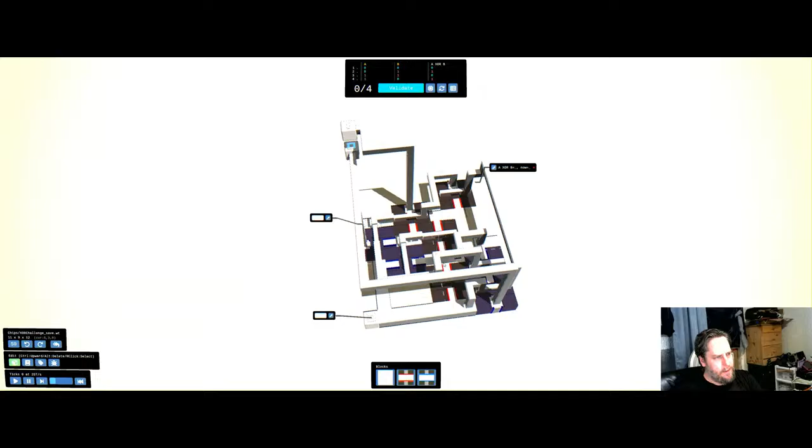This is based off of a design that I had found. I was really struggling with the NAND gate or the AND gate, one of the gates. I was trying to get it down to 5 MOSFET chips, and I really couldn't wrap my brain around it.

I probably spent off and on, either Sunday or Saturday or both, one of those days, spent off and on working on it.

I'm having trouble explaining this. My thought process, the way I work, is I like to focus on something I want to figure out, and I'll really get into it. If I'm noticing I'm not making any progress after a while, let's say like an hour, what I typically do is I'll leave it alone. I want to kind of break, try to break where my brain's going for a moment, because it's not working.

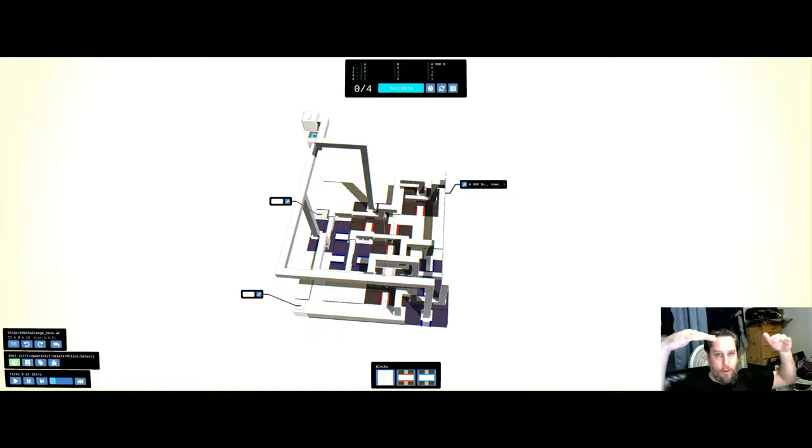So I try to snap out of it, break myself away for a moment, whether it's to go get a snack or a drink, use the restroom. Sometimes I'll even go outside, get a breath of fresh air, things like that. I do that with my work, my job, all sorts of things in my life. That's something I do because I'm an optimizer, and I am somebody who will just bang his head against that wall until I figure it out.

I'm very patient. When I get on a task that I want to figure out, I will spend sometimes a lot of time figuring it out.

So throughout the weekend, even though I probably have several hours on this game, I probably only spent a couple of those hours actually at my computer, and other times I either just broke away, did something else. But I didn't close out the game, because the moment something pops in my head and I go, oh yeah, let me try this, I want to get back into it and get right on it. So even if it's something on the computer or at my office or anything in my life, if I'm doing that—

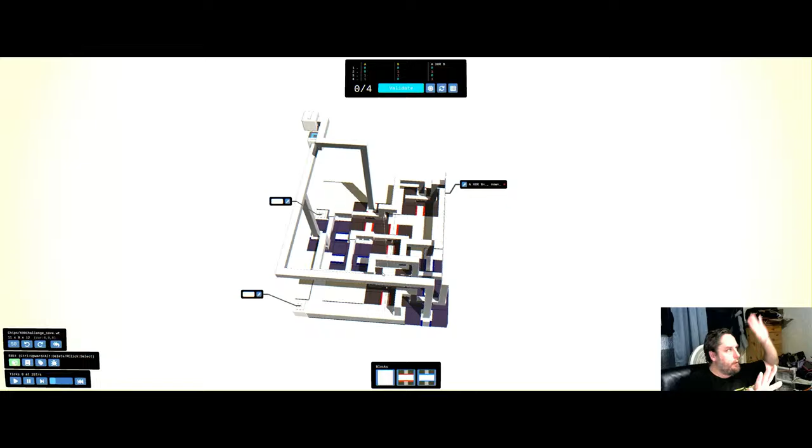but that's kind of my process, I'm trying to figure this thing out. And if I'm struggling with it, sometimes I'll just leave it static, leave it where it's at, and remove myself from the situation and go do something else to give my brain a break away from it, because wherever I'm at in my thinking is not working, and I've been working on it for a while, and I want to kind of break that thought process for a moment and then get back to it from maybe another angle of attack or something.

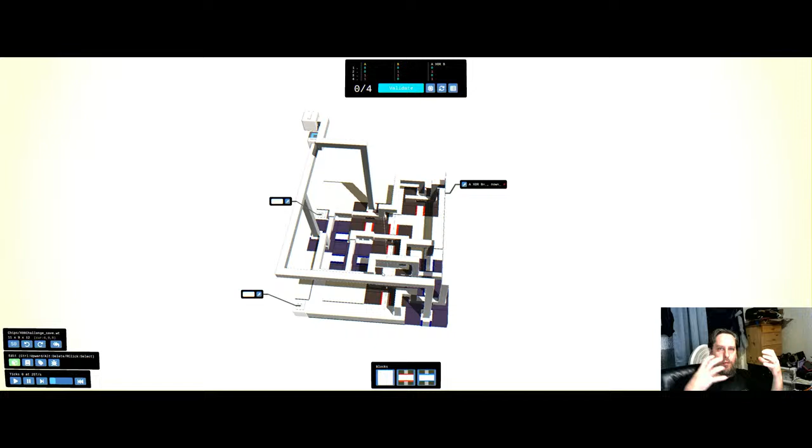That's the best way I can try to explain it. I don't consider myself as someone who has an ego. Like, I don't sit here and go, when I figure this stuff out, 'oh man, I'm so smart, look at me, I'm amazing.' I don't do that stuff. I don't do anything like this, or even in my job or my life, as waving a flag like 'look at me, look how smart I am, look how good I am at something.' I just focus on the task and achieve it.

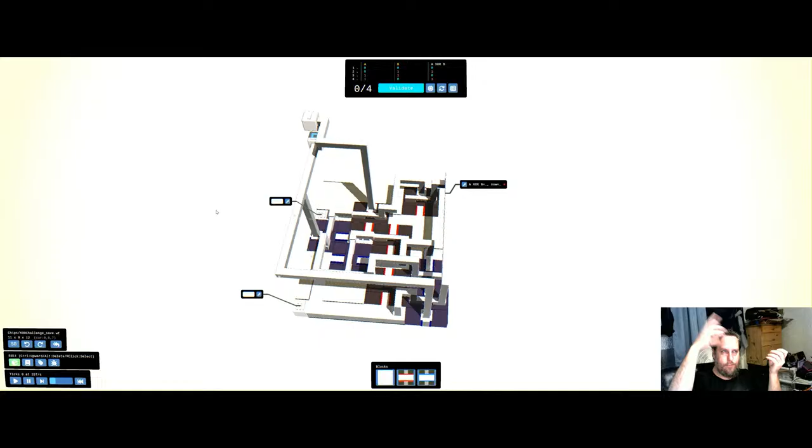Because, without going on a really long tangent, another example I can give is someone like Mike Tyson when he was young. Cus D'Amato, his trainer, his guru, whoever you want to call him, who was training him early on, was hypnotizing him and doing things with his psyche to say, 'this isn't about you, it's about the task. There is no you, it's just the task.' That's kind of a similar thought process that I have with things like this.

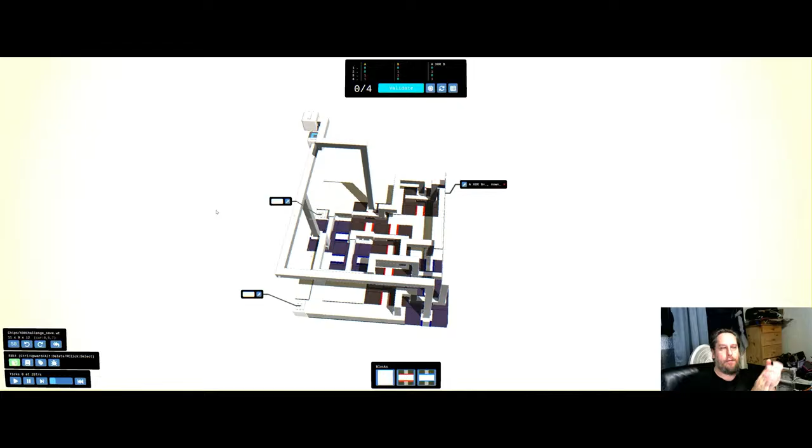It's not about whether I succeed or fail, it's not me, it's this thing. So that's another example I can try to give about that.

I'm still human. I'm not saying I'm some kind of robot, but I'm robot-like in that sense. I really try to remove my ego from a lot of things. Most of the time I'm successful, but sometimes I'm not because I'm a human being.

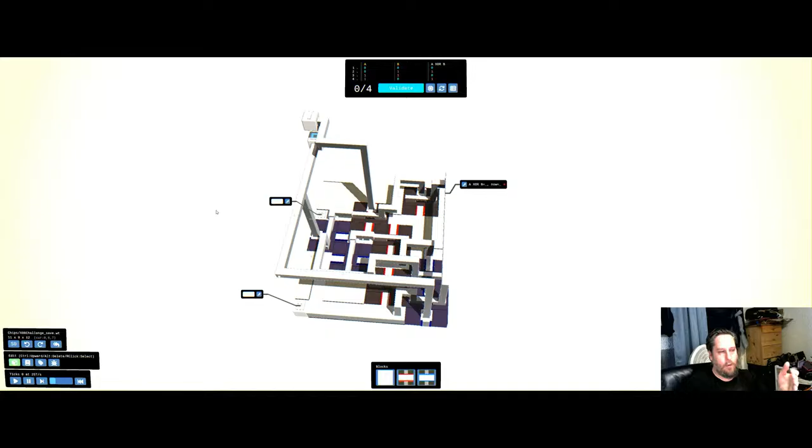So that being said, if there's something I'm doing and it's frustrating because it's like, man, why isn't this working? I messed around with this design, I think it was on the AND or the NAND or one of the two. I was really trying to implement it. Let's just, I know this one works, so let me just save it because I guess I had deleted it, messing around with it earlier.

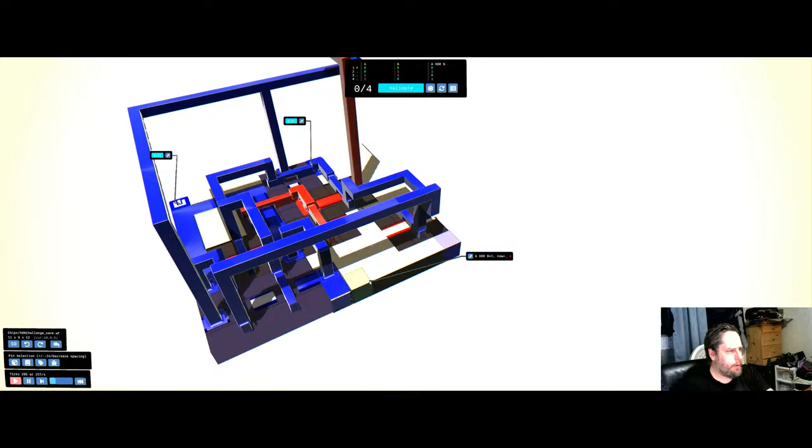Where was the output? I don't even remember where the output was on this one. I think this is it right here.

Yeah, I mean the blueprint's there anyways.

I want to say it was the XOR because I had already had a good OR chip and I was struggling with getting an advanced XOR. I couldn't wrap my brain around why it wouldn't work. And I think this is where I found this one online through Steam.

I did check a few things like the Reddit. I couldn't get it for some reason. The Discord server invite doesn't work, I couldn't get into the Discord server, so I was looking for some kind of guidance with stuff. The only thing I found was a picture through Steam that gave me this.

I know in the game there's ways to import and export blueprints, which is nice, but it's important for me that I understand why it works too. So I really don't want to blindly copy stuff.

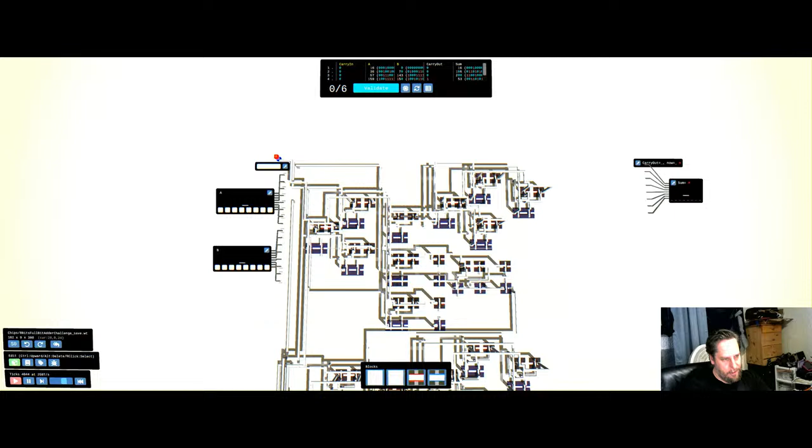So here's the one that I came up with. This is like within day 2 or so of doing this game, and you can see how inefficient it is. Because again, you're using all of this stuff and just integrating it, and it's just so many blocks, so much real estate, so much going on.

It's just terrible. I don't remember if I actually finished it. Did I? Oh, these moved up there. I think I did, and you just have to move them to their individual positions, because I'm seeing outputs. I don't remember, it's been at least a week or so. But I think this was a working chip, if I remember right.

And it was at that point I'm like, this is terrible. I know this one's working, and you see how this one's red. I haven't done anything with these yet because I wanted to optimize these, and I wanted to wrap my brain around how all this stuff works.

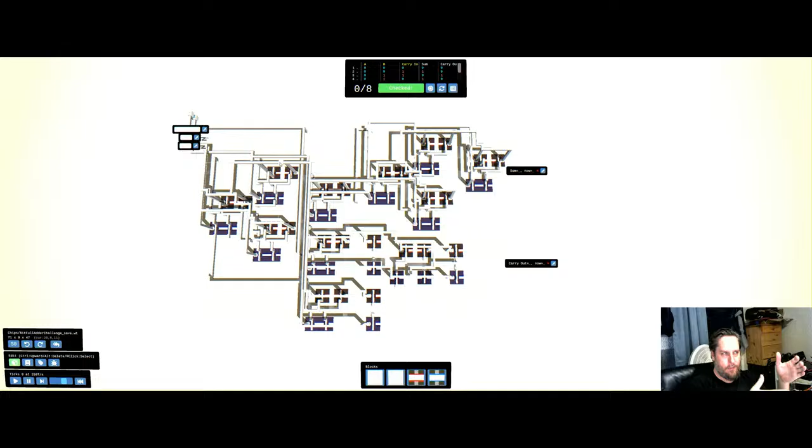So I'm kind of just looking back at what I had done, and you can see how horrible these things are. But when you're first starting out and first grasping this stuff, you just want it to function, to show that you're doing inputs, outputs, voltage, and actually doing that. And then you can start taking the next step.

So yeah, this was my first design of this chip. Pretty rough, but it worked. These worked, they're just inefficient. I thought I'd finish this one, but maybe at that point I was like, nah, I already know this is horrible, this is completely inefficient, and I just want to leave this alone and get back to the basics and understand how this stuff really works.

And that's where I'm getting to. I'm starting to feel more confident that I'm getting this stuff pretty good. So that being said...

Back to the ego and the learning thing, I definitely separate myself, because it's easy to feel defeated and look at this stuff and go, I don't understand this, this is hard, this is terrible. I get it, I really do. I deal with that, people. I deal with those feelings myself. It's rare, but I deal with it when I come across it.

And if I really have something I want to learn, the moment I feel that frustration, where I'm like, God, I really wish this would work, or this problem would go away, the moment that frustration creeps in, I instantly turn it around. I go from feeling angry or mad into, hey, I'm about to learn something.

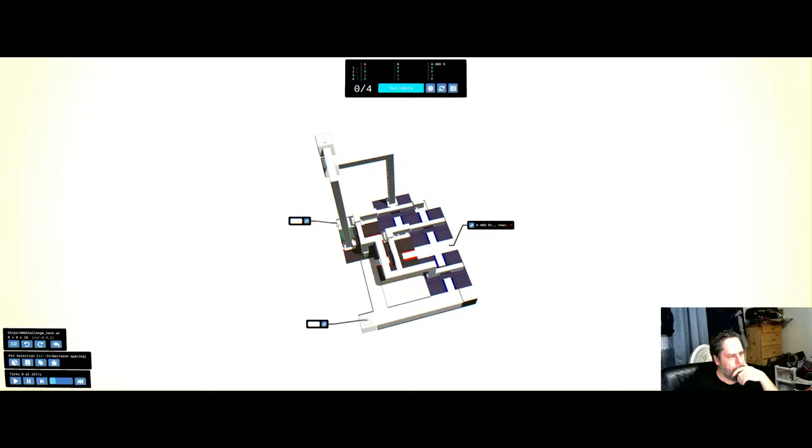So I couldn't figure this guy out. I think it was Saturday. I think Sunday I got this design, and then I started working on how this design works. So I'll just show it real quick. So you see how those gates work - those are pretty cool. Once I first saw that, I thought, wow, that's pretty cool.

But I couldn't figure it out. I want to understand how to come up with this, and I don't want to just simply use it and copy it. What's important is really doing the outside math, and you have to do some solving and planning. If you're trying to do it on the fly and you don't really know what you're doing - like I thought I knew, but I didn't - you're going to fix one problem but cause another, and then fix that problem and cause another. That was the spiral I was involved in.

I'm like, man, okay, I got this. Now I caused that problem. Now I got this, now I caused that problem - and I can explain that in the other blueprint. The other one, I think it was this one or this one. Let me see. So you can see some of that design from the other one.

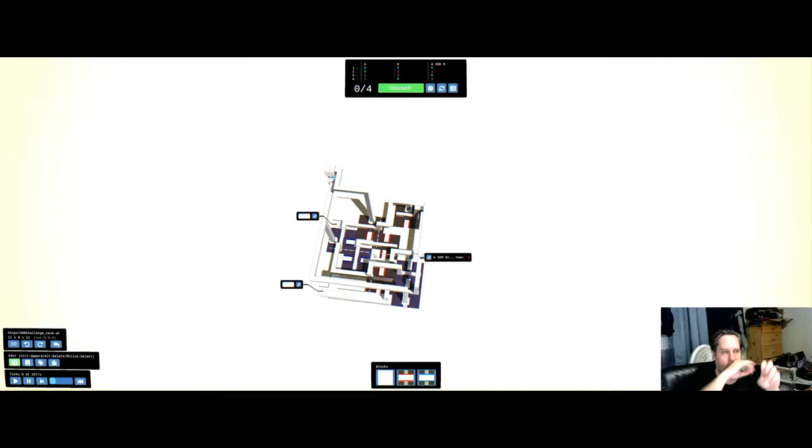In the AND and the OR, they're just opposites. So you can do essentially the same design, and you're just switching the negative and positive - switching that stuff, and you have to switch your chips. So this is the design I came up with, and I think I can make it even better.

But what I figured out for this chip was taking that - was it the AND? So AND is typically positive flow, and the NAND, your NOR, your XNOR, it's going to be negative - the opposite flow. These are all AC, these are currents. This is alternating current, this is all this stuff.

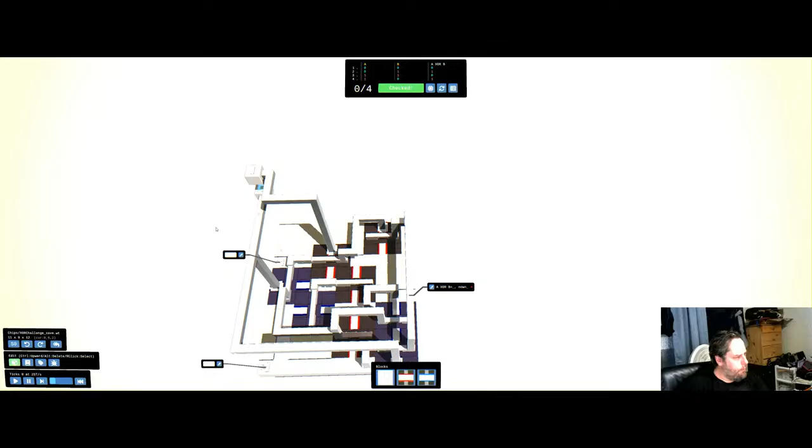And so this one being the XOR, you're going to be doing mostly positive flow. There's a quick little tip on the schematic I didn't know - whenever you have opposite flow, they typically will have a circle on the output.

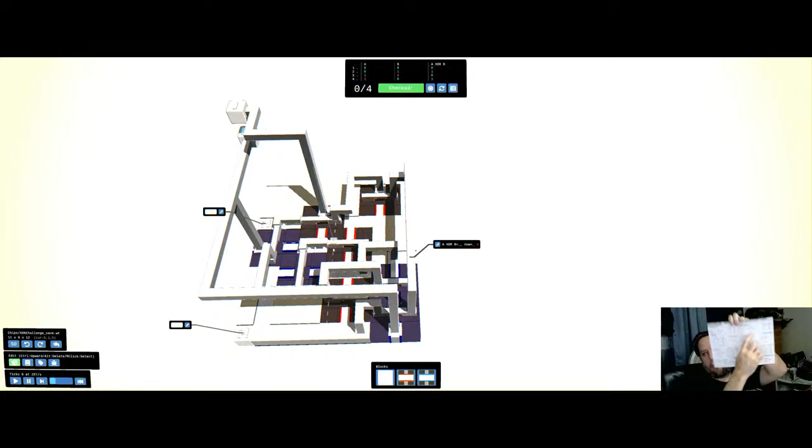That means that's where your flow is coming from. It's not an inverter, it's just reversed, and that's why you see the opposites.

You look at your AND gate and your NAND gate, you look at the truth tables, they're flipped. Your A and B outputting 0, you're going to get a 0 on an AND gate, but on a NAND gate you're going to get a 1. So they're flipped.

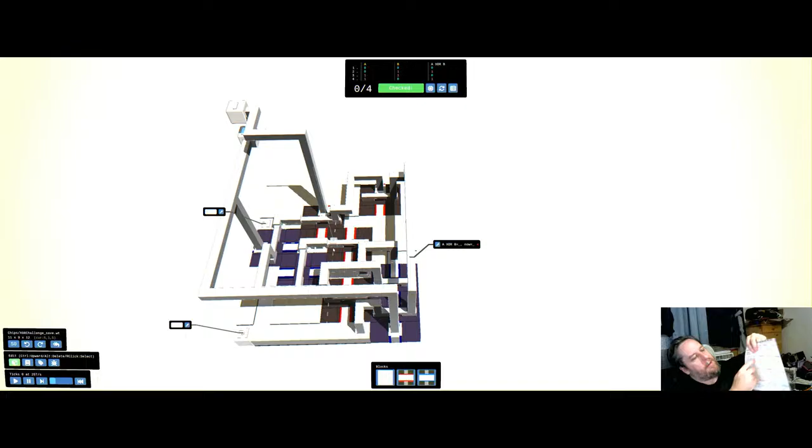The outputs—I mean, I could probably just show my screen instead of showing a paper I printed out, but this really helped me because I could see it.

On your AND gate, every output that's a 0, on your NAND gate the output's a 1, and vice versa. When the AND gate output's a 0 or a 1, on the NAND gate it's the opposite. So it's just simply flipped. They're the same chip—you're just going to flip your input and your output, your positive and your negative.

Your red is your positive, the blue could be the negative—whatever helps you wrap your brain around this. Just make sure you understand that there's a positive flow and there's a negative flow.

Again, if you're going to flip them, make sure that if I put this one here down to here, and vice versa the other one over here, you're going to need to change your chips. This is a positive chip, this is a negative chip—you're red, you're blue. The red guy is not going to flow through a blue chip like that, so you have to reverse them.

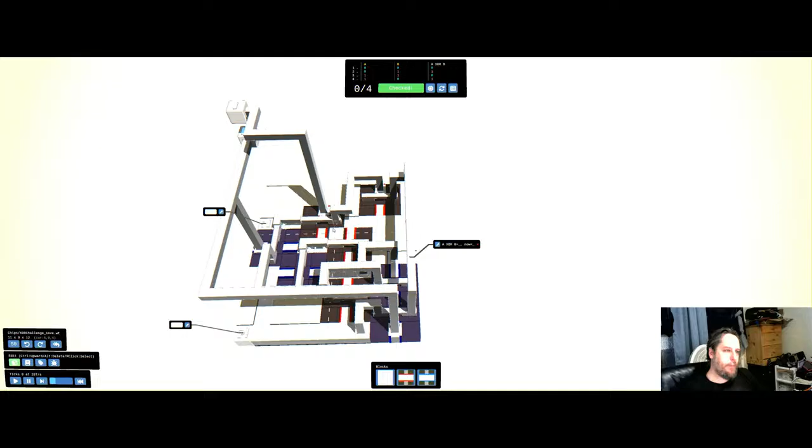So I think I've rambled on enough. Let's do this.

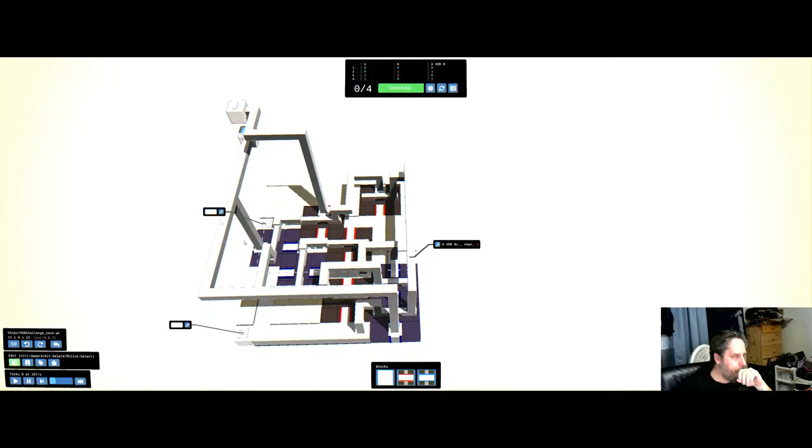This is something I just drew out just before I started. I'm not looking for... let me just get into it. Okay.

So I was working on the XOR chip. I have a good XOR chip—it has 8 processors, 8 MOSFETs, 8 transistors. I believe I have a 7 transistor solution for it.

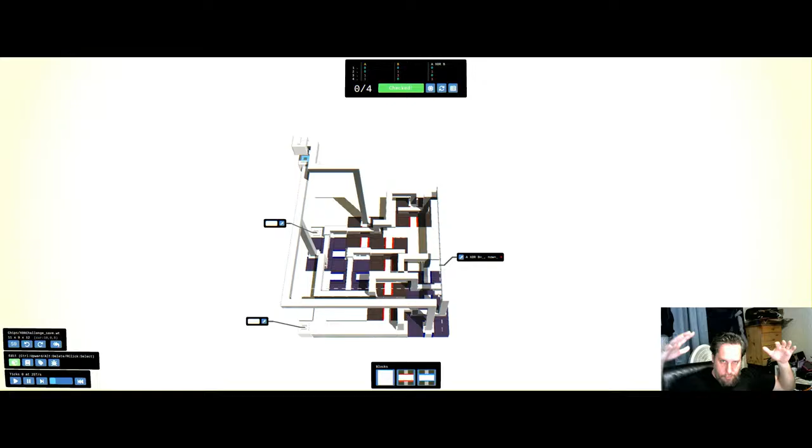And let's see if I got it. I haven't figured out the 6 yet, but this is me just showing the process, showing how my mind works and how I figured it out. Let's see if it does it.

So you can see I simply copied that AND chip. This should be an AND version of it because there's the power here. Let me show that real quick before, because I'll want to.

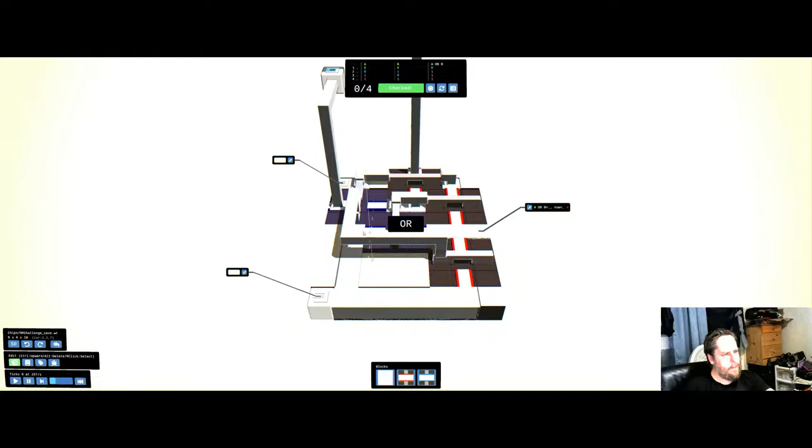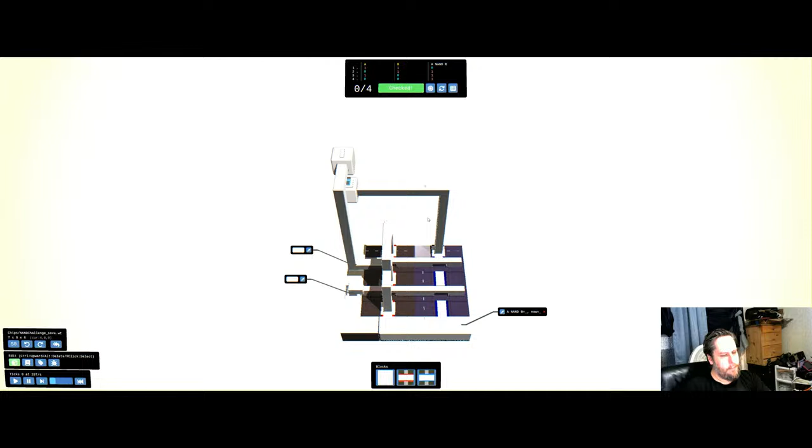So look at the OR—no, I need to look at the NAND. Sorry, I don't want to throw people off. Here's the NAND. I didn't do it—wait a minute. So have I not done a NOR? No, I haven't. That's why. Okay, so I haven't even done that yet, but I want to explain that.

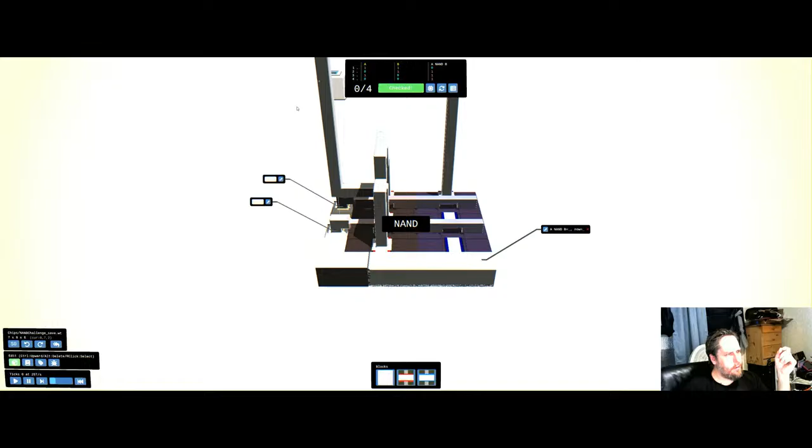So why do I have a... I haven't done a NOR gate yet. There's something that I'm messing up.

So these are the... okay, so when you get to the end, you were at the 6. The schematic was the 6 processor, 6 transistor. Good Lord, man, I'm going in the wrong direction.

Because I haven't done a NOR, and I definitely haven't done an XNOR yet. But I was trying to explain how they are flipped, even though I haven't done them yet. I've done them in my mind on some of this already, so let's get back to what I was talking about—I'll deal with that later.

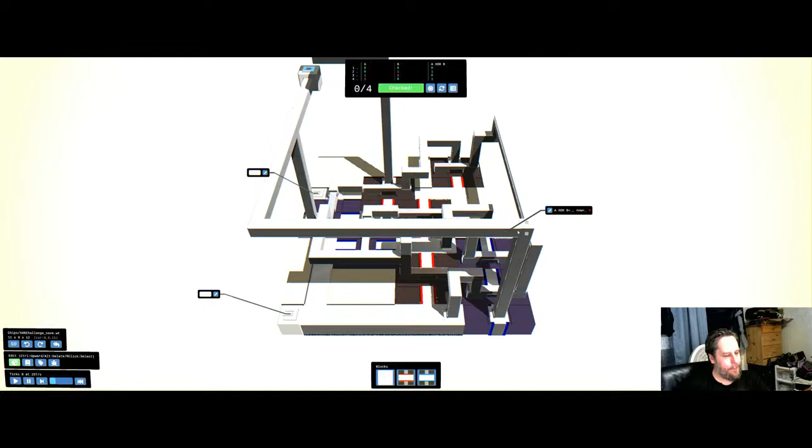So I made a functioning XOR chip by simply taking the design I learned through, it was like a Steam screenshot or something I saw, and I just basically copied it. I didn't import the blueprint, so I drew it out myself.

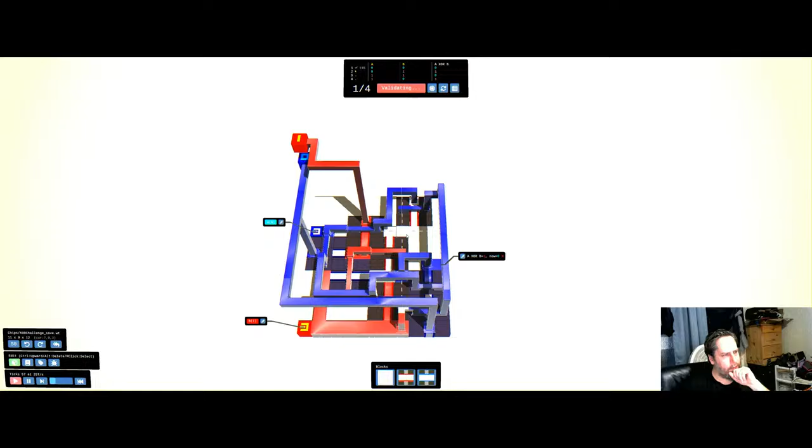And then I added on, in order to do an XOR chip, what I figured out is I just simply added—excuse me, I needed... the final one, I think it was, which one was it? One of these, it was when the red came through, I had to stop it right here. I think it was that one.

So I think here, in order to get when A and B were red and you wanted a blue output, I knew that the only way I was going to get blue was to send the blue negative. I needed that to get to the output, and in order to get that there...

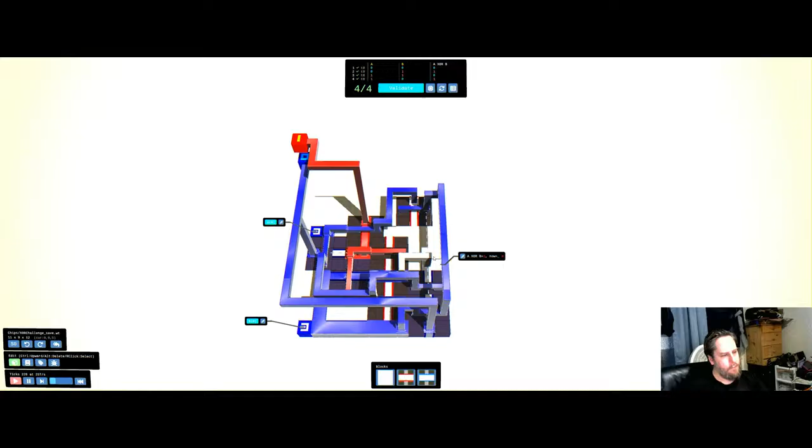I needed an NMOS in series so that the A and the B switch the gates on to allow it to flow through. But at the same time, I had this guy coming down here, and it was still allowed to go through right here because this blue gate was there, and it would allow the red through, and then it would cause a short.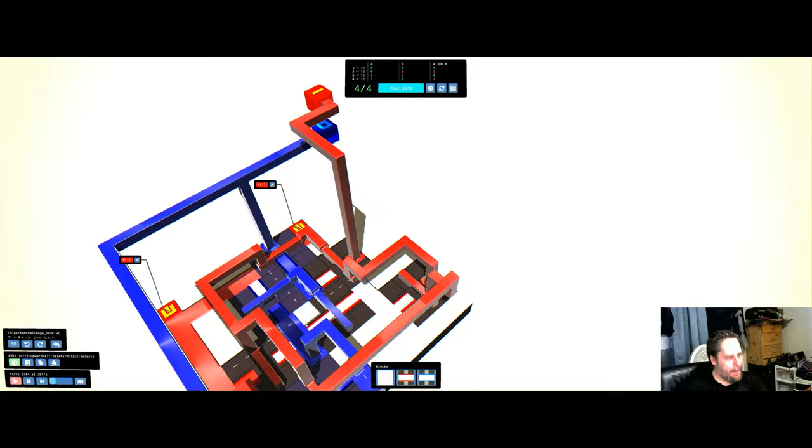So I had to redirect this flow to the PMOS for the red, and then I had to redirect one of the red gates over so that when it's red, it'll stop it. So this isn't the most efficient design, but it's functional, and it's still way better than 16 transistors. You can see this was 8.

So at this point I'm like, all right, what else can I do? I know it's possible to get to 6, to maybe get the volume down, the ticks down, and as far as I know I haven't seen it. There's no screenshots of it. I'm sure there's a blueprint floating around somewhere, probably on the Discord, but I'm not on it, so I still want to figure it out anyways.

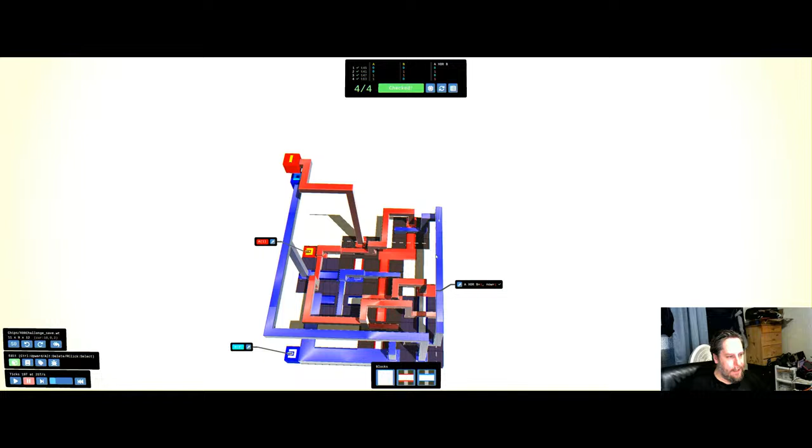Even if I saw someone's design like this one with this nice little castle gate deal, the outward castle gate, the inward castle gate, I think it's a pretty cool design. I wanted to understand how they figured that out and how they got it. So this is the simplest thing I can do. I thought, well, let's work on this chip. I figured out how to make it work, but what can I do to make this even more efficient? So let's scrap this design and implement the schematic I believe I figured out.

And let's see if I can. Again, it's probably not going to be the most efficient block wise. I just want it to work to show that I figured out the schematic. So here's me figuring this stuff out essentially on my own.

All right, let's do it that way. I'm going to space it out on purpose just so I can show how this stuff works. That guy needs to go there. This is a negative. The A needs to go there. That needs to go there. Again, I'm spacing it out on purpose just to show the flow easier.

Did I lose you? Did we crash? That was weird. Okay.

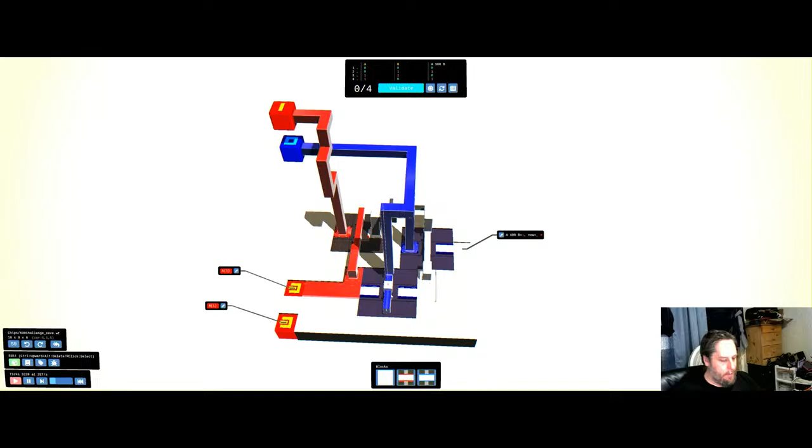I'm trying to do it so it was 7 transistors, but I already messed it up. Let me see if my other solution works. I have to go back to the drawing board on this one.

It'd be better. Nah, just restart the whole thing. Fuck it, I don't know, I'm doing things the hard way. All right, let's try this other one real quick.

So that was PMOS to an NMOS. Let's see if I ended up doing the same thing. I don't think so, I think I got this one.

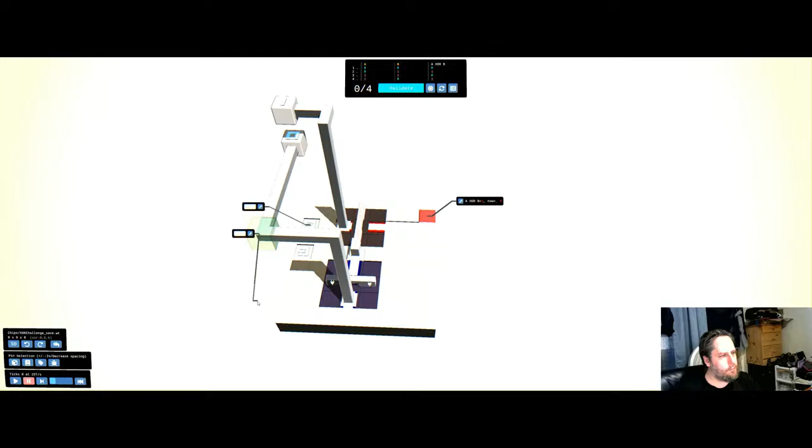It's 1 and 3, we want red. I don't know. Probably need the inverter there.

They need to, no, I need to do them in parallel. Screwing this up.

How does that work? Okay, I think I get it. This needs to go to the other one. Okay. You don't need to do all that.

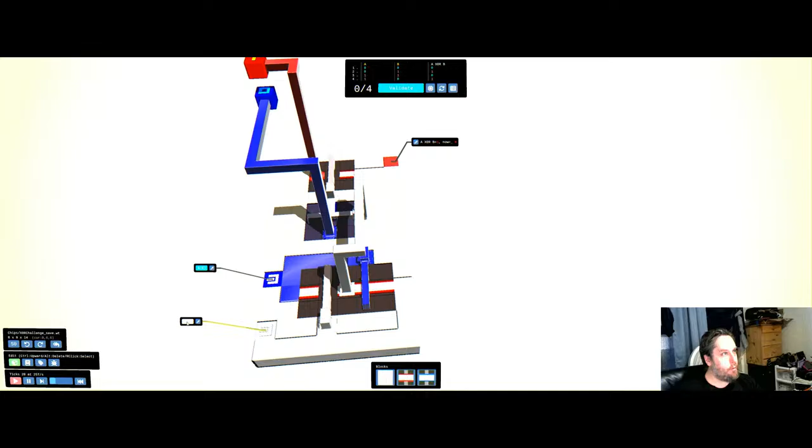All right, so this is going to be 2 and 4. So A is blue, B is red. All right, so that works. And then when you flip them, when A is red and B is blue, it does the same thing. So that one worked.

Unfortunately it was 4 transistors, but you're essentially setting up an inverter where it's not an inverter. It's the opposite. It's basically if you have 2 inputs and you change the inputs, you still want the same output.

I'm messing this up again, I don't know what that's called. It's not an inverter, because the inverter is simply one input, and you can alternate its output. So if you send in a positive flow, you want it to be negative, and vice versa. If you send in a negative, you want it to be positive.

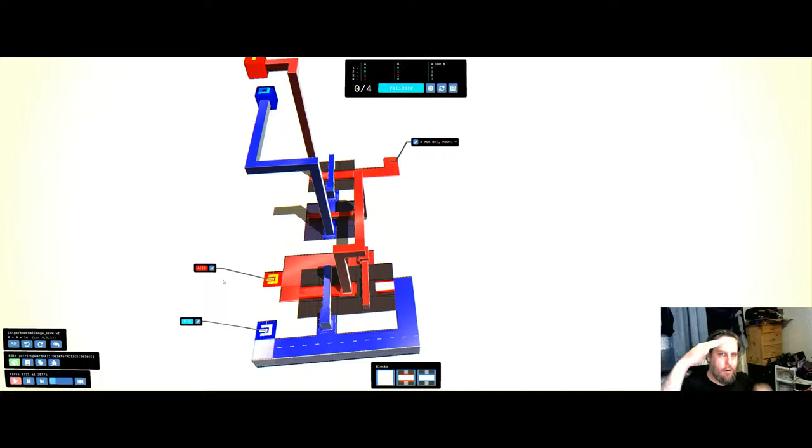So you send in a 0, it's a 1, and vice versa. You send in a 1, it's a 0. So that's the NOT gate, an inverter. This is something I don't remember the name of, but you're basically alternating the inputs while still achieving the same output.

And then I do that output. This is just simply so that I can take this negative flow and still feed it through to this gate, to allow the positive flow through.

But I need to go back to the drawing board on this other one and maybe not use the A.

All right, so I got a working 4 transistor solution. What I can do is that output can be combined with the other output of my other solution. So let's go back to this one and see if I can figure it out.

But again, I might have to draw it out. So I have, those are good. But my 1 and 3 is not good. So what did I mess up here?

I can take... okay, so here's something interesting I'm already noticing: that solution I just did, the 1 and the 3, or what would be, they're numbered differently. The truth tables, some of the stuff's different, but basically 2 and 4 are good.

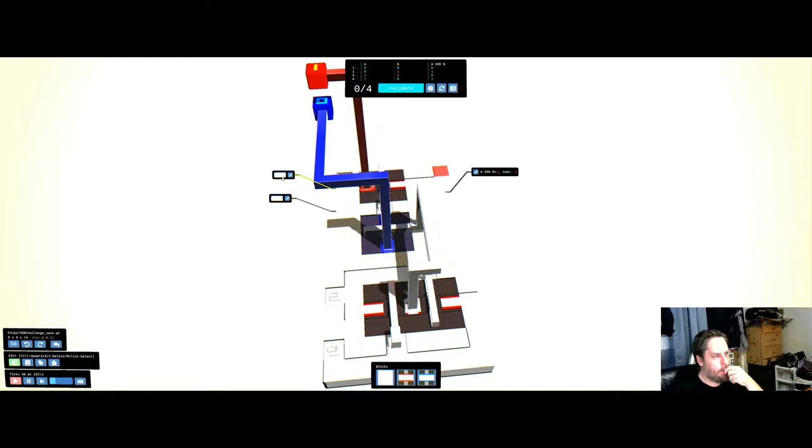Regardless of what I do, these guys are way over here again. So here we just need one of them to make it.

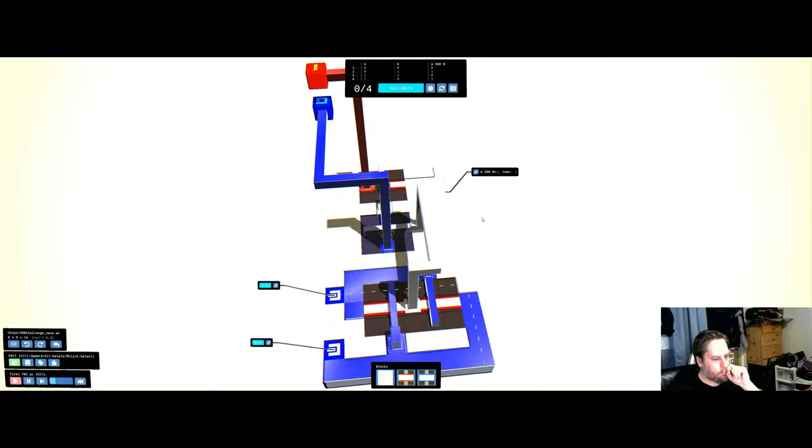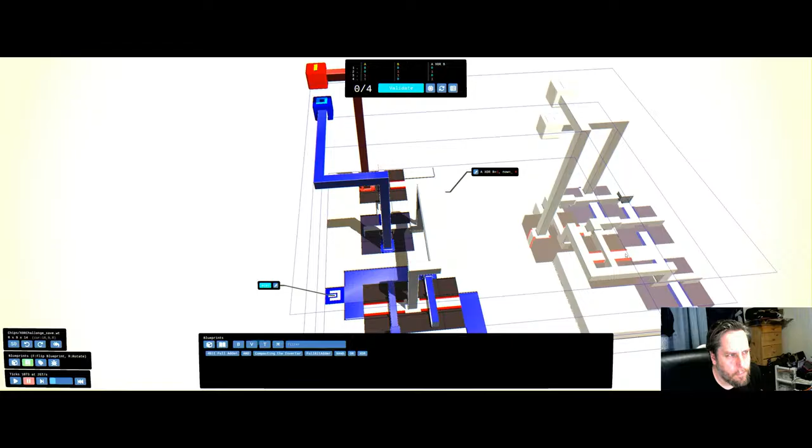The solution is... well, yeah, the positive one is in an AND circuit and in an OR circuit. So in this guy, I think this was A and this was B, but it'll still work.

All right, so let's see the solution here. Did I grab the wrong blueprint? I thought this was the AND circuit. No, I'm sorry, I've got it. Okay.

So he is sending, and I'm just being fair, he is able to send A through this gate, through it's the castle wall guy. It's the first part, and then the power does that. So simply sending power to an NMOS gives you that.

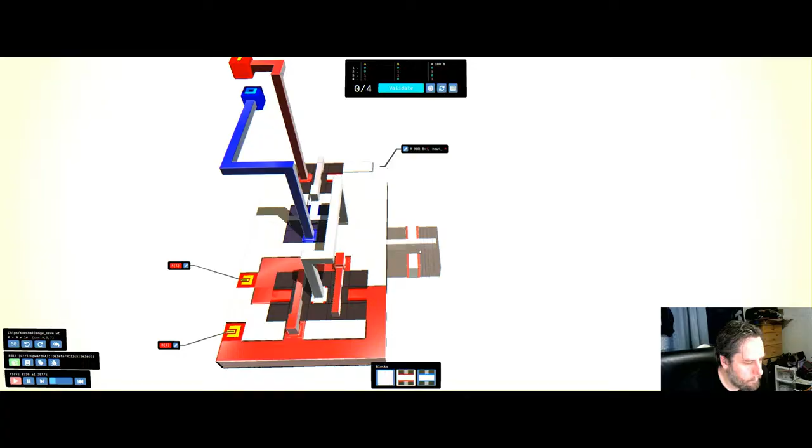But I think I don't want both to go through. I just want one in its current state. So what I'm trying to figure out is which one do I want to send at which time.

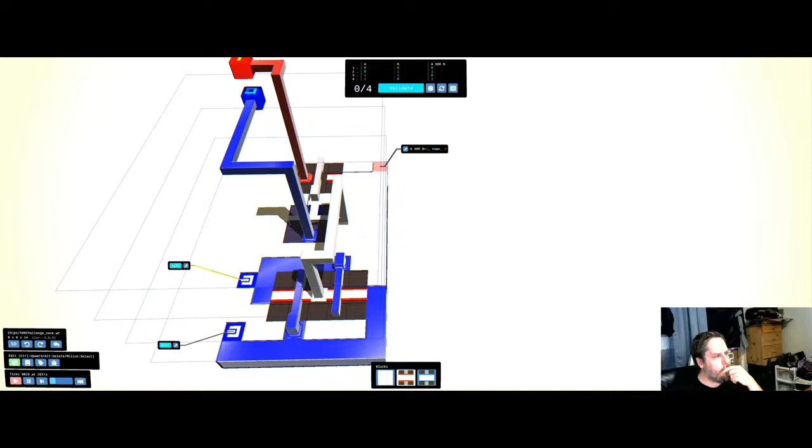At this time, let's look at what's working. That won't cause a conflict. So does that mean I would send the red, use the red for number 3?

And that way, when B is blue, it's not causing a problem at the end. Okay, so we need this guy to go to here. Okay. No, that's not what I want.

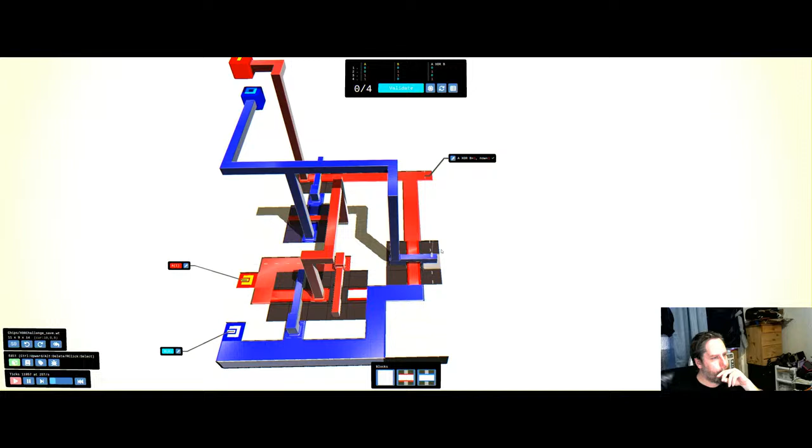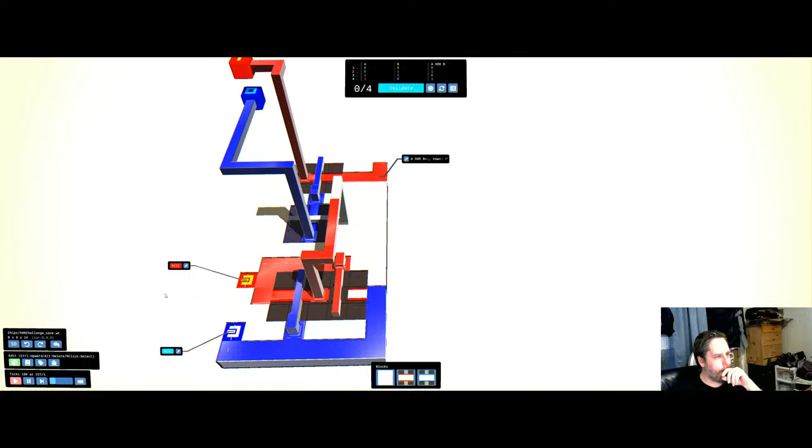Doing the same thing that I did over the weekend that I kind of don't want to do. I should be able to draw it out. It should work. So this one works for solutions 2 and 4. When you alternate them, you get the same solution. Okay.

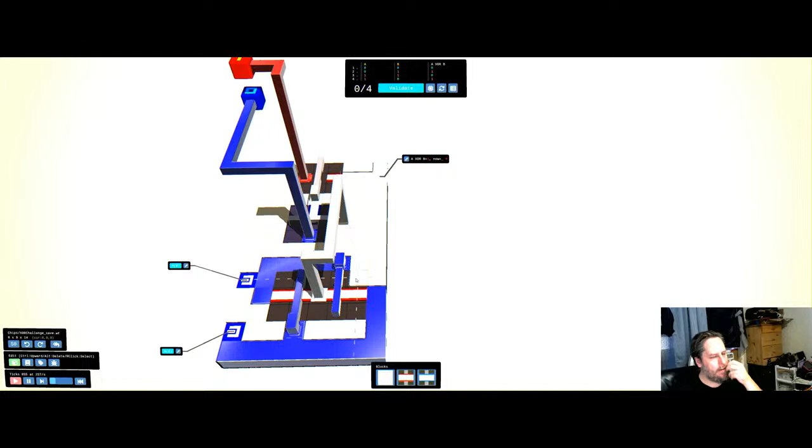I need to come up with a solution to where either one of these guys simply goes to the end when they're in that state, but we don't have a backfeed. So maybe it's the opposite. Maybe I need to send - no, because you're going to still get a backfeed either way, whether it's A or B.

That's the thing I didn't think about. I do have to go to work pretty soon. I really feel like I'm on the right track, though.

Because I think once I figure out how I'm going to do it, I can also combine it even further. Part of one solution is in another, and I can implement it there. Because all it is again is gates, drawbridges, letting this guy through. Nope, now you can't go through. Things like that.

But I'm still reverting back to what I was doing before, and that's not what I want to do. I don't want to spend 2 hours putting in another one, slap another one in. Oh, now it's this, slap another one. Now it's that. I should be able to draw it out and plan it and implement it.

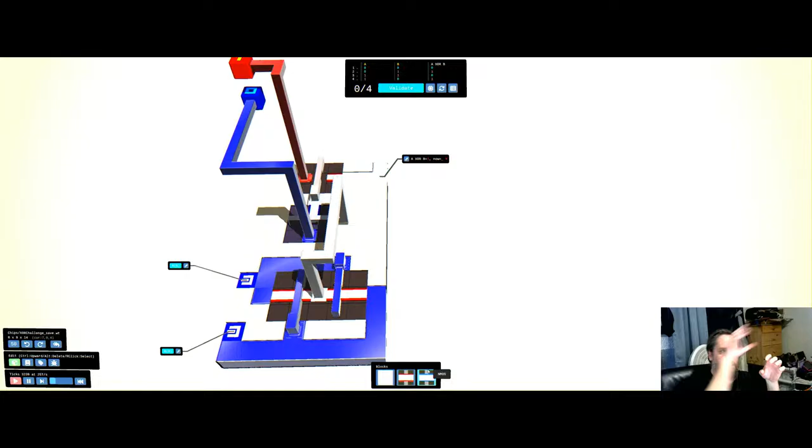Just like I showed with that XOR earlier, I knew what ones would work. I just simply copy and pasted those guys, connected them, boom. And I should be able to do the same thing here that I'm trying to do. So in order to get what I need, an XOR gate - I need an AND gate for the first solution.

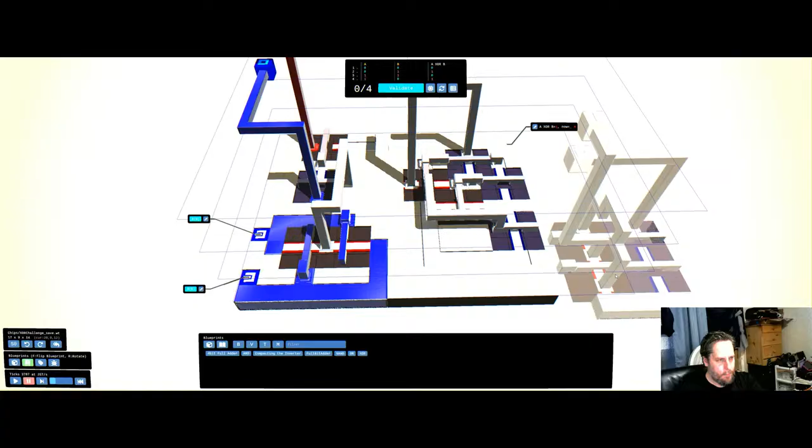And here it is right here. And I need a NAND gate or a NOR gate for the second, for the third. So this one is doing 1 and 3.

In here, that's right. That's what I figured out. I was like, all right, I need power. It's not the whole thing, you just need that portion of it. The answer's right in front of me.

That's why I went there and looked at it. Can't just save it, huh? I think it automatically saves. Let's leave it. Let's go to the AND gate.

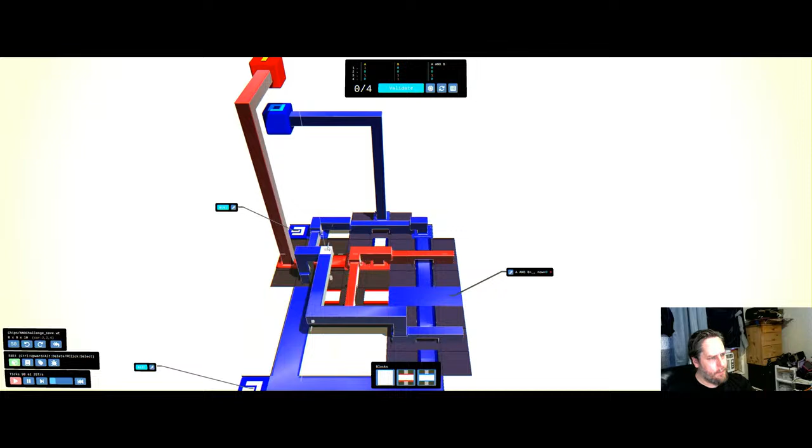All right, so you want solution number 2, where they're both blue. This is what it does. Just follow the trace. Your A is going through an NMOS as a gate. You don't necessarily need that, but you may need to implement it, so just keep it in mind.

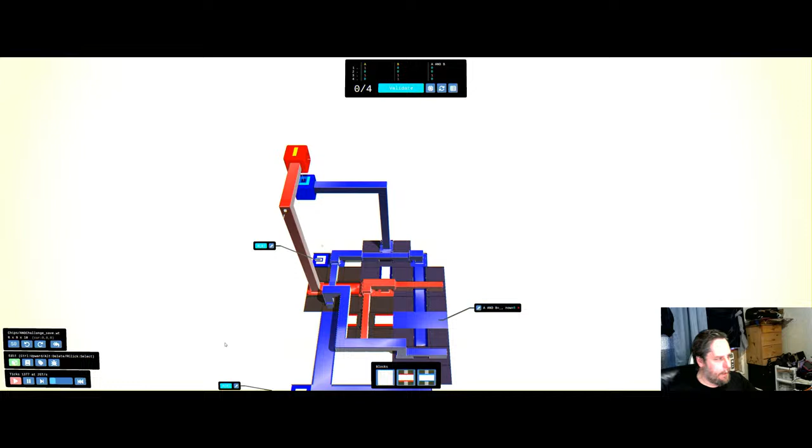So again, I can simply go out and implement that here. We're going to go to a PMOS. This guy is going to be an NMOS. And then we're going to do that. And then we're going to get our output. Okay.

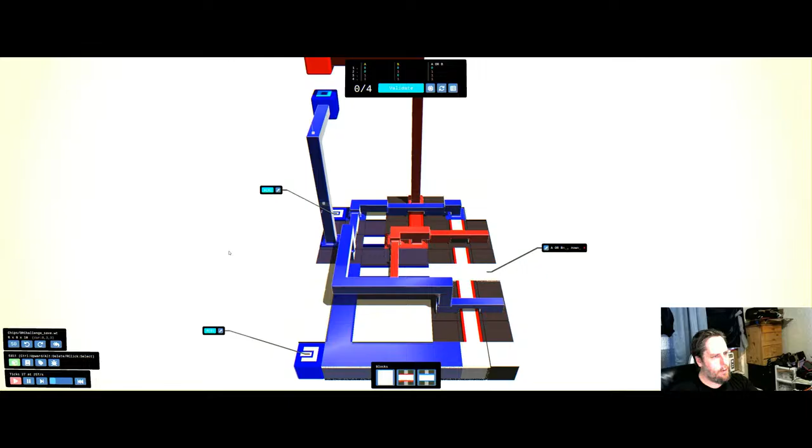Okay, here's the OR gate. Solution number 1 is what we're shooting for, and it's essentially the same thing. Same chip design, however it's a different trace.

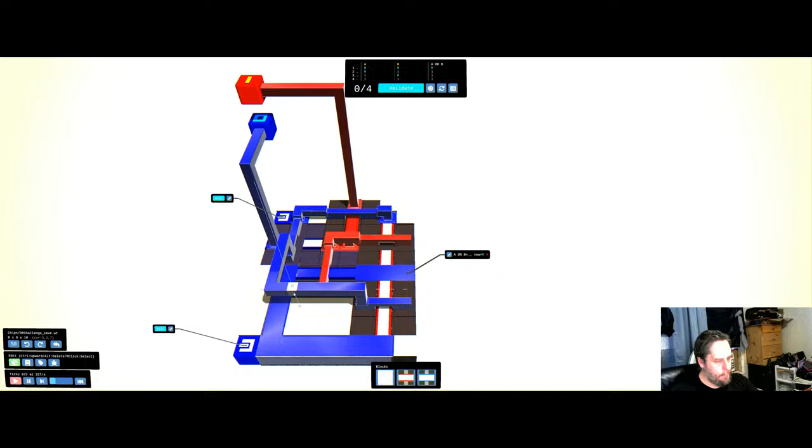So you got B going through an NMOS that is fed from a gate from the PMOS of your positive. And the only reason that can go through is because A is also blue. A is activating the gate. Okay, so let's try that.

PMOS feeds NMOS. I'm going to do it exactly how I saw it. So you have B feeding that, A feeding that. Your output is going to go here. But I believe we're going to have another short.

All right, so here's that. Same thing, see the blue going back? So we have to stop blue from heading back that way. That's the problem, because once you do that, you're good there. But now when you activate A... I'm sorry, B. B is the problem. Wait a minute.

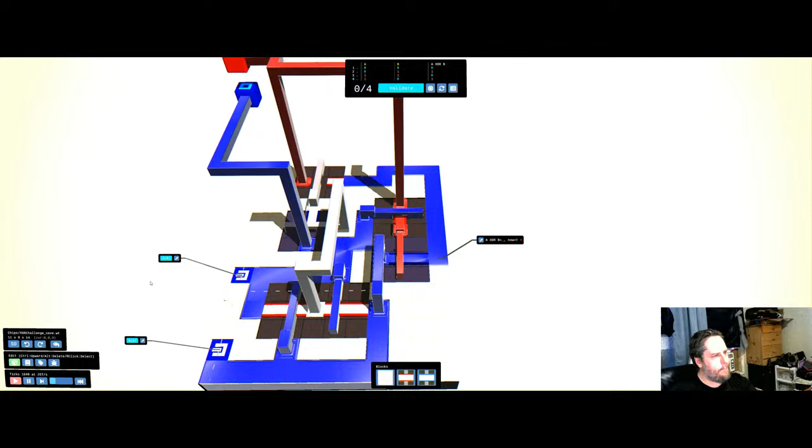Okay, we're good there. Turn on B, we're good there. Turn on the next solution, same thing. And then now... did we just figure it out already? And it's 6 transistors?

How did we lose the third one? The third one. Oh, we haven't worked on that one yet. Duh.

So you want to send blue - the only way to make this one work is sending, and that's on a NAND or a NOR. I need that to be able to allow it to go through, but I need it to stop. Okay, it's stopped there. It's allowed to flow through there. I think I got it.

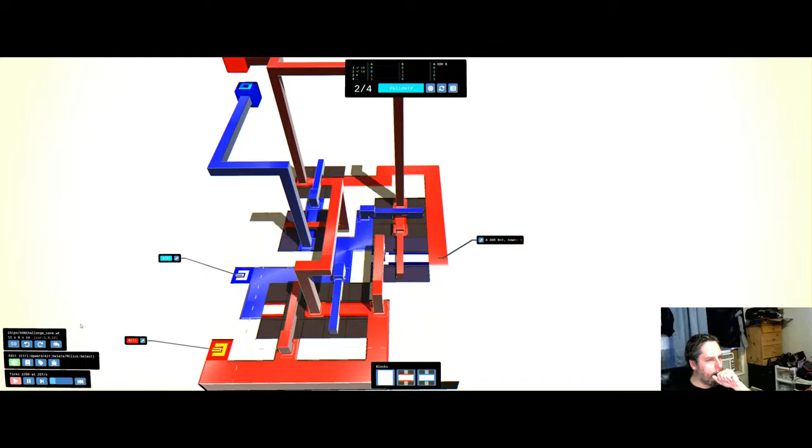Man, I wish I didn't have to do one more. There's a 6 transistor solution out there, and I bet it's very similar to those other ones where you got these castle wall type gate things going on, and you combine one. But I just want it kind of functional. The problem is I'm trying to not do an 8 transistor one because I already have an 8 transistor solution.

That was good, that was good. This is good. I wonder if we need to not be up against that, if for some reason it's just freaking it out.

Okay, I need to allow that blue to go through. Why is that? I was going to say, why is that red showing up? It's red, it's not allowing that to flow through, which is not allowing that guy to go out.

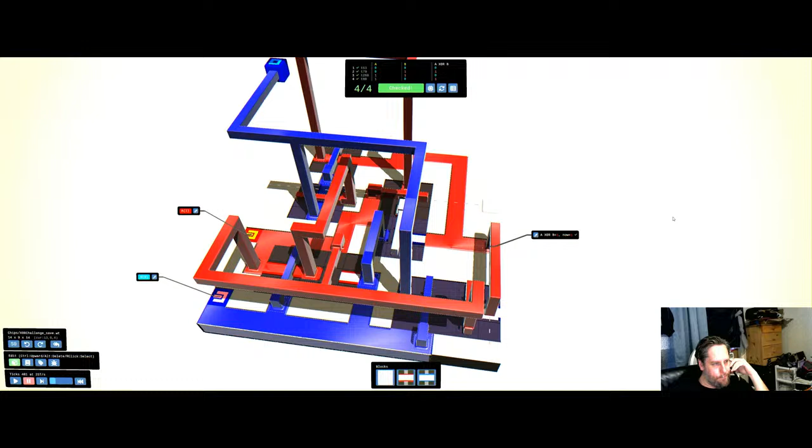They can't. Correct, correct. Yeah, yeah. Yeah, I used to do a lot of engineering stuff at times and cover for them, and I just started saying no for that stuff. Unless I'm an engineer and I get the engineer pay, I won't do it. I do the things that I want to do. I do what I want to learn, and it's been very easy over the years. So... hmm, yes.